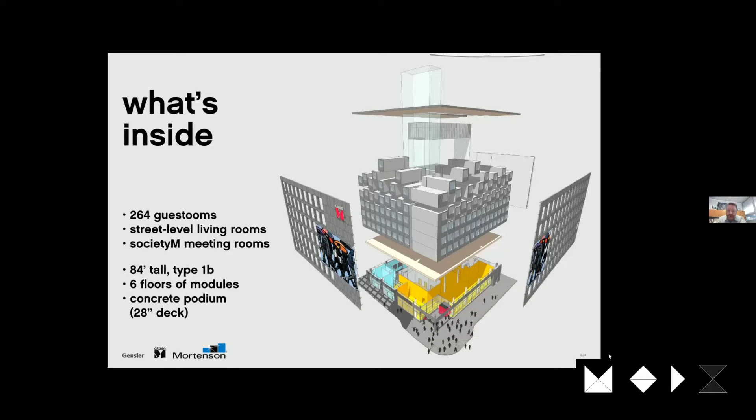So really just trying to get just under high rise, 6 floors of modular units. So kind of a conventional construction on the core walls for shear and seismic, and our transfer deck, which you can see highlighted there, is a 28-inch thick, mildly reinforced concrete deck. So heavy concrete deck, where then we can stack out what turns out to be 222 modular units to make up the 264 guest rooms.

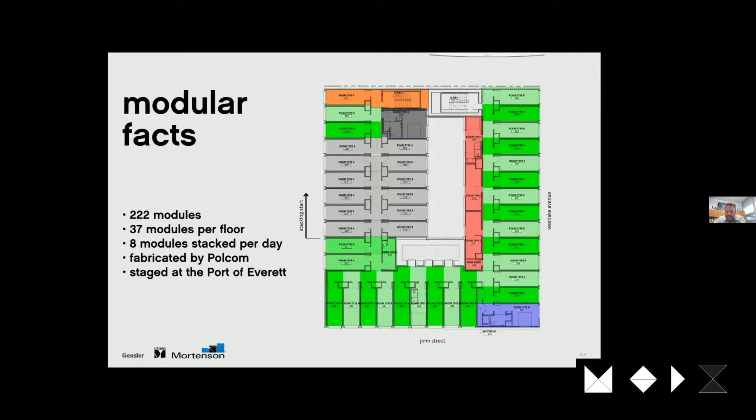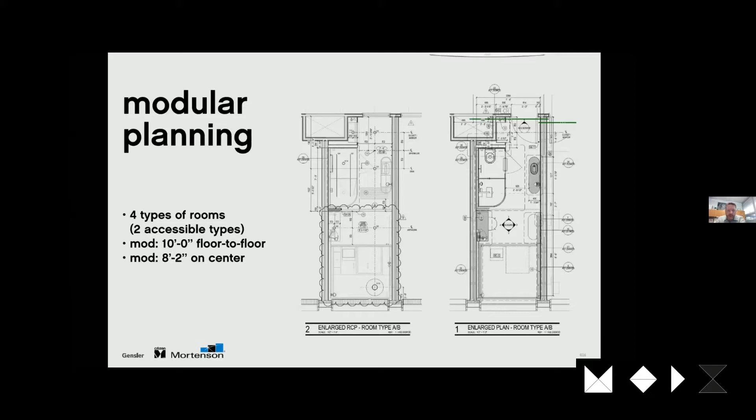So this was our first adventure into full volumetric modular as a company. citizenM had plenty of experience in Europe, and we're in the middle of stacking out a hotel in New York, all being manufactured by Polcom. Polcom is out of Poland. So we quickly joined forces with them, went to their factory, tried to understand their business so we can start to put together all the details and coordination between our local designers and the Polcom manufacturing designers.

So the big thing with modular is really putting together the drawings in a way that we could coordinate with the local AHJs, authorities having jurisdiction, and then also with Washington State L&I. So in Washington, Oregon, and Idaho, modular manufacturing is the jurisdiction of the state, and the state here only allows, or at least at this time could only allow, L&I inspectors to be in the factory. So what we had to do was create 2 sets of plans, one for the city of Seattle, SDCI, and one for Washington L&I, so they could see the difference between factory-built modular and the local built components.

So in this drawing, you can see that things that are in half tone are those things that are going to be field applied and installed, and the things that are in full tone will be modular components coming from the factory.

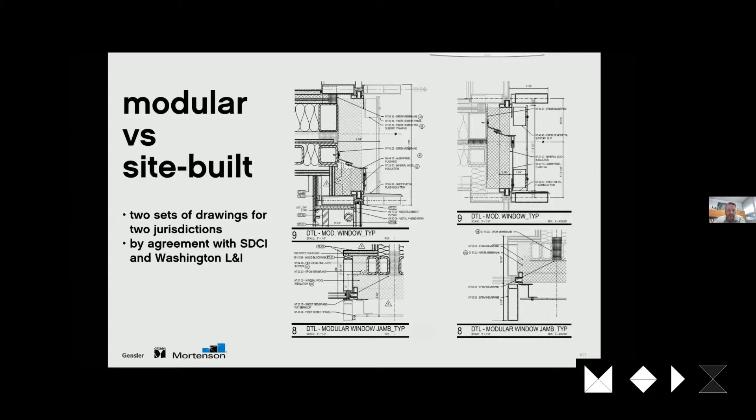The other thing that we had to do that was really unique here that hadn't been done by citizenM or Polcom in the past was build these cages and these units to fit in our seismic conditions here in the Pacific Northwest and on the West Coast. When they built in Europe or on the East Coast, seismic really isn't considered. So they would build the cages very stiff. And the stiff cages were great for transportation and preservation of finishes on the inside. But in Seattle and in these high seismic zones, the cages actually need to be flexible and they need to be able to move in a seismic event. And that caused problems for us with our finishes.

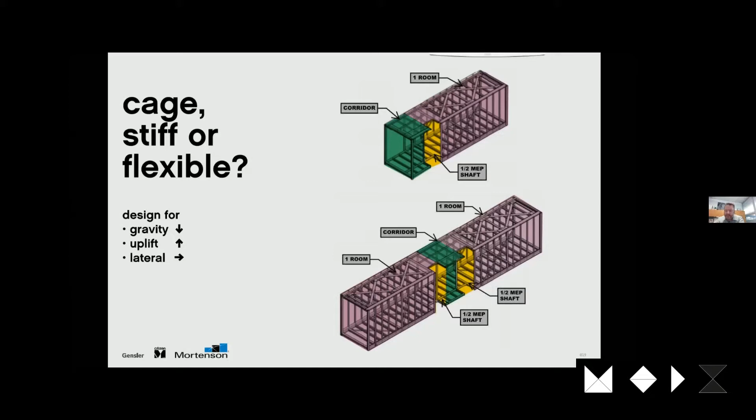We initially put together a cage that met the seismic requirements, finished out one unit and drove it on the roads in Poland, which are definitely a good test, pretty bumpy roads, and came back and saw that we had major cracking issues with drywall and finishes because the cages were too flexible. So we ended up putting temporary shipping braces on all the cages to stiffen them up on transport, but then had to cut those in the field once we stacked them to allow for seismic movement.

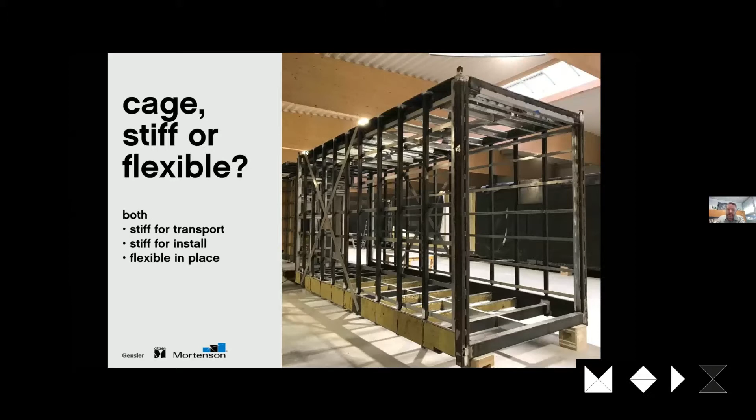So when you look at this picture of the cage, you can see this X brace here. Gauge metal X brace was only there for transportation. And then once it got to the field in Seattle, we had to cut the straps at the top to unlock the cage to allow for more seismic flexibility.

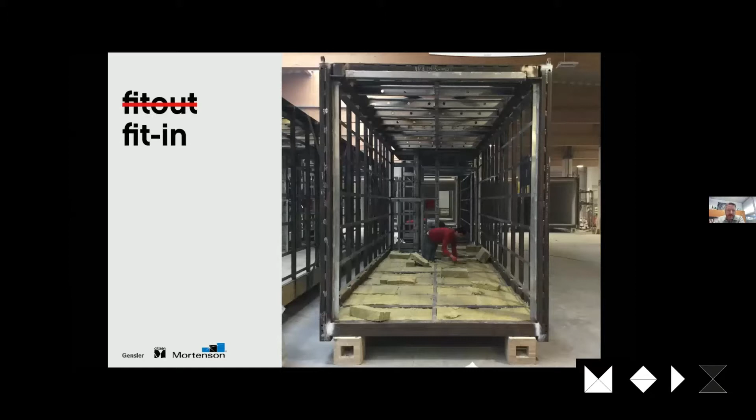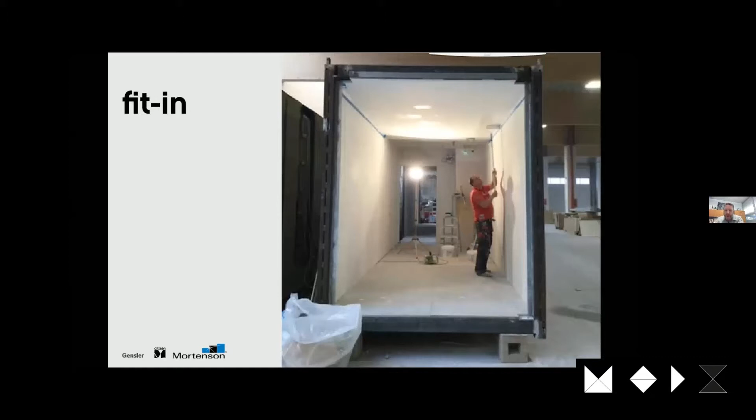I guess one of the other interesting things with modular, if you haven't done full volumetric modular yet, is really how it's constructed from the inside out. As you can see, the insulation, the wiring, all the finishes are built from the inside, and then completed on the outside when the inside's done.

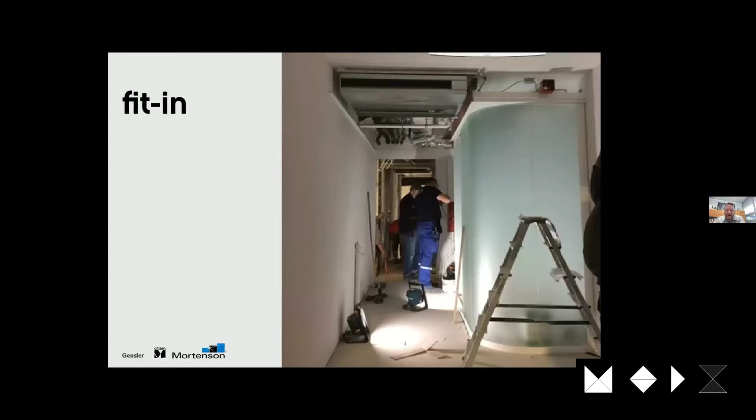So here we're building their hotel rooms complete. All finishes are complete. This is a shot of that modular unit in the factory. Everything's in: the flooring, the glass shower pod enclosure, the HVAC, all the wallpaper, wall sconces, everything's in except for the mattress in the bed and the TV on the wall. So again, speed, quality, when you're in a factory setting and you're repeating things over and over again at one level, factory floor level, versus climbing up and down a building, it's just much more consistent, and it's easier for us to control the quality.

The big thing here, the golden ticket, like I mentioned, is Washington State L&I inspectors were full-time in the factory, witnessing the installation and the plumbing tests and all that, and really QCing the unit as it was being built.

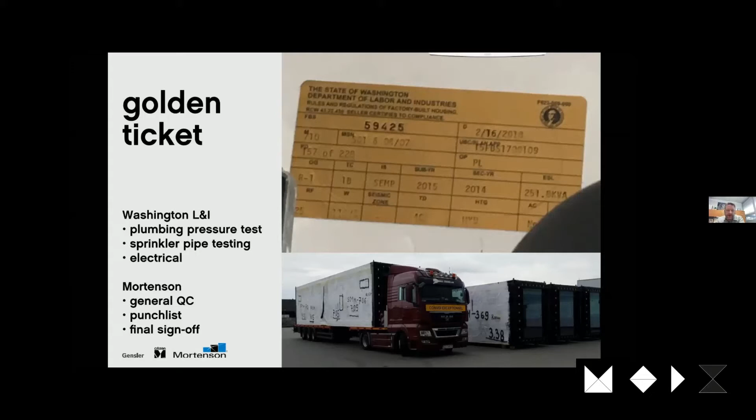And then final compliance with them is this State of Washington sticker that they put on over the door of each unit, so that when we set them in Seattle, the local inspectors knew that L&I had already inspected inside the rooms, so they didn't enter the rooms. The only thing we did in Seattle was pull the fire alarm wiring, so the fire marshal would go in to see the smoke detector, fire strobe, and fire alarm wiring go in. Other than that, it's all inspected and finished by L&I.

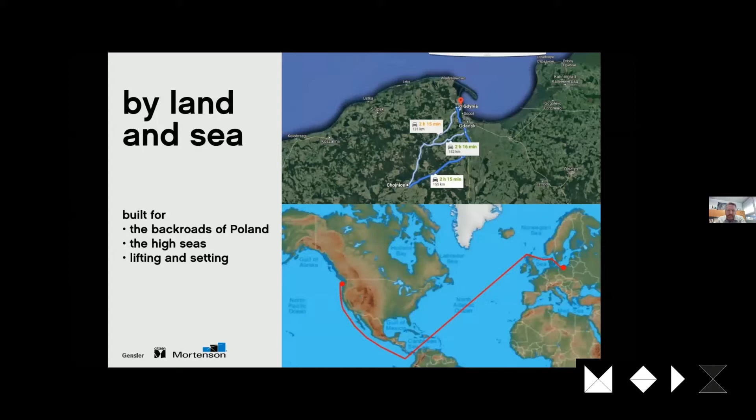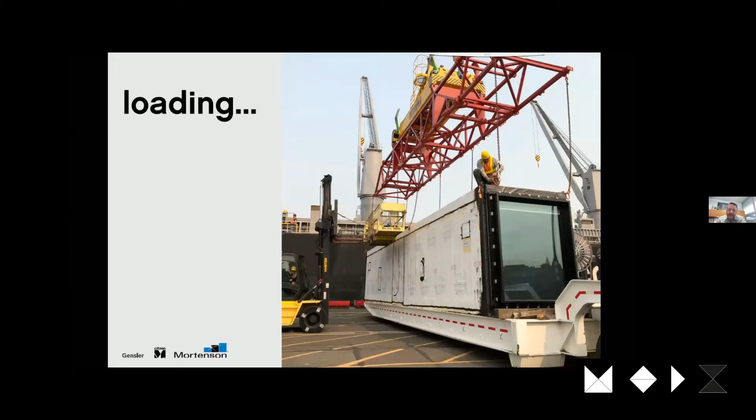So almost all the units for the hotel were shipped at once. Most all of them were shipped and stowed inside the shipping vessel. Several were put on the deck above just because of space inside, but the majority were shipped inside the vessel.

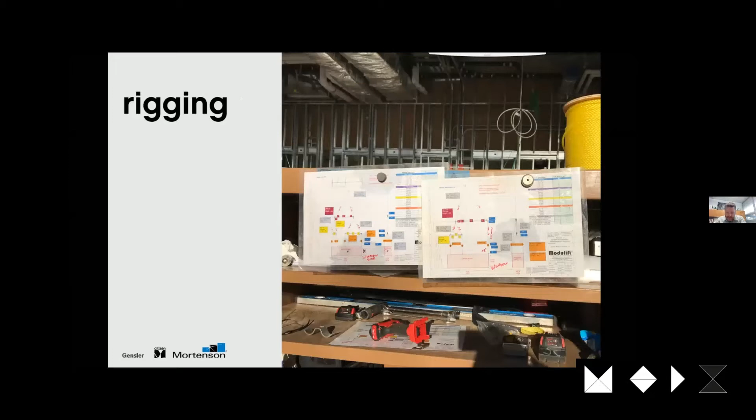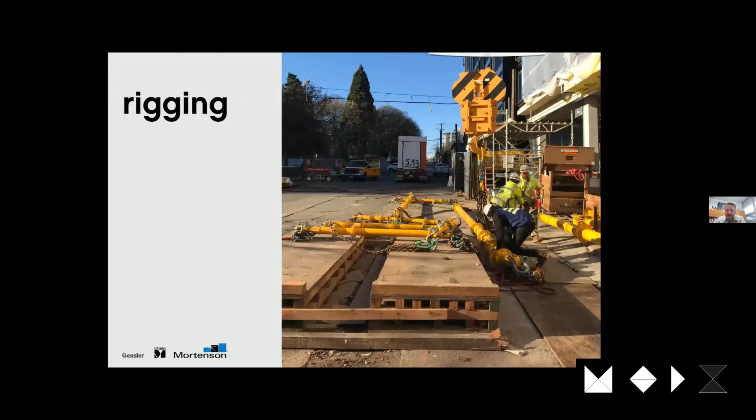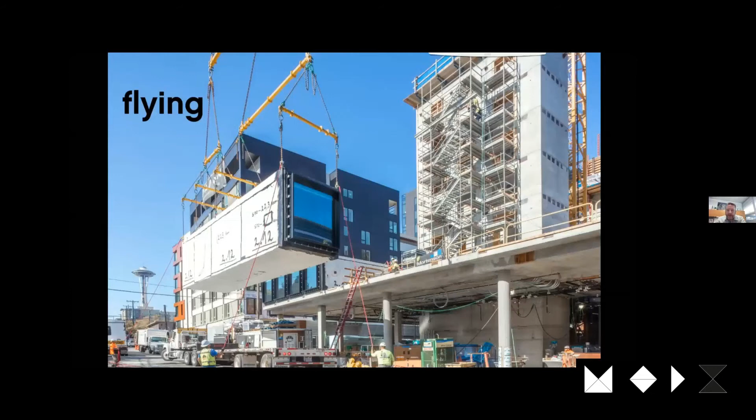So once we got them to the site, really planning the rigging for them is pretty complicated. There were a lot of different configurations, a lot of different harnesses to connect. And this is on the list of lessons learned. This is one where we've tried to make the rigging configurations and the center of gravity on the units more consistent, because these changeouts of rigging can take quite a bit of time between modular unit types. So you can see it's pretty elaborate just to get one hooked up. A lot of work goes into it before flying them on the deck and stacking out the units.

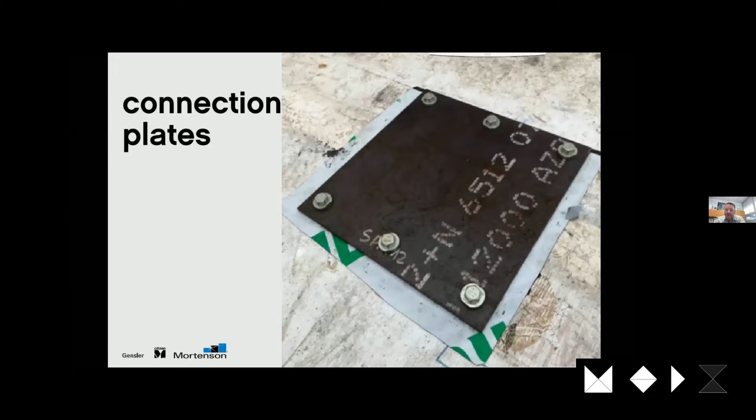We couldn't pre-drill them in the factory because of the high seismic conditions. The bolt holes were not allowed to be slotted, so they had to be really as-built in the field and drilled in the field. So each level, you can imagine 6 levels of all those plates. It's a lot of drilling, a lot of holes in module units, a lot of work.

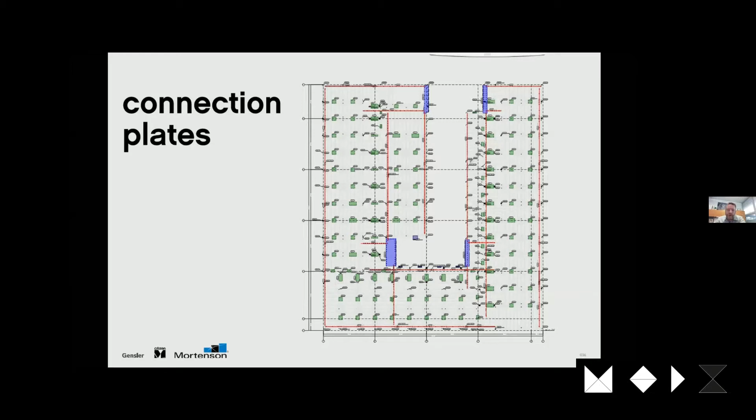So, we talked a little bit about the benefits of the factory. Not only is it quality, but it's precision. The construction tolerances were really tight and things fit up really well in the field. As they built the cages in the factory, they would use a total station to measure the cages and ensure that they were square and all within 1/8 of an inch overall tolerance from end to end, which is really tight for field construction.

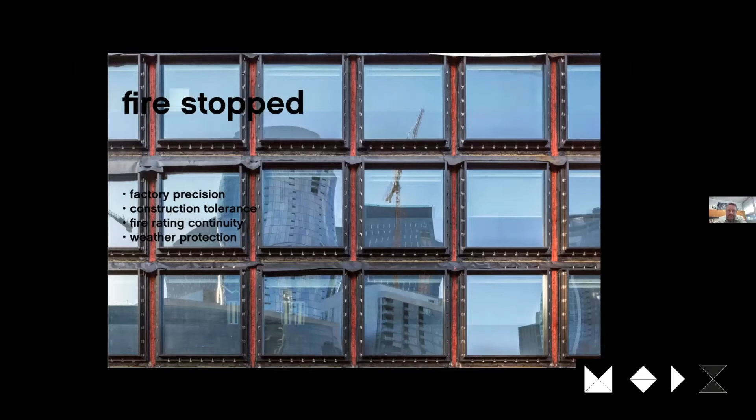So weather protection, fire rating, you can see the joints in between. We had to go through and stuff them with mineral wool first, then spray them with fire caulking. You can see the horizontal stuffed, and then the fire caulking follows, just to make sure there's no gaps in between that can draw smoke or flame.

So there's Seattle's hotel as stacked out. So that's the final stack. And when we got to the roof, we put metal decking down and poured a more conventional concrete roof topping before our insulation and roofing materials went down.

So next we went to Los Angeles. So the Los Angeles project for citizenM is in the heart of downtown LA. Pretty constrained site. Again, though, really conducive to modular, right? So modular, what we love about full volumetric is it's less disruption to the neighborhood. If you have tight sites that you don't have laydown areas for materials, you're stacking out, in this case, it was 9 floors of modular.

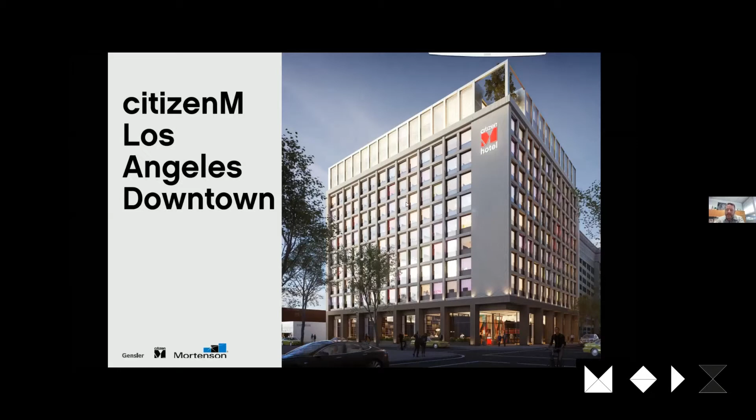There's modular units up here. So 9 floors of modular units that are stacked out by just delivering trucks, right? So really a lot less disruption to the neighborhood, a lot less need for laydown space, and much faster approach. And in this case, this site was very conducive to modular, as it was pretty much a square site. So 11 stories, 315 keys, 9 levels of modular units.

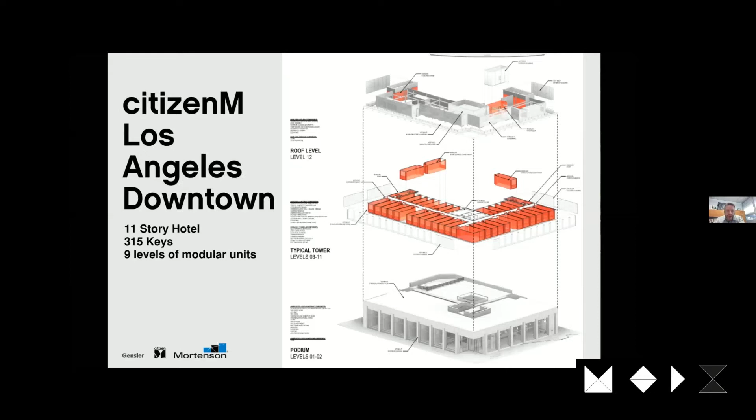And you can see in this exploded view, we've also incorporated some of our MEP rooms up at the roof. We wanted to see what else we could push to have delivered modularly versus field built. So I think that was a good choice here to kind of add to what we were traditionally doing or learning to do.

In this case, though, we did switch manufacturers, and for some of the reasons we talked about before, the lessons learned, the modular units coming from Polcom were wrapped in DensGlass and then some temporary waterproofing elements. And in this case, we went to China and explored multiple manufacturers with citizenM, probably 8 months in advance of starting the LA project, and really found that CIMC, who is one of the world's largest container manufacturers, also has extensive experience in modular manufacturing and production. As a matter of fact, they have 3 million square feet of factory floor dedicated solely to modular production. So it's in Jiangmen, China.

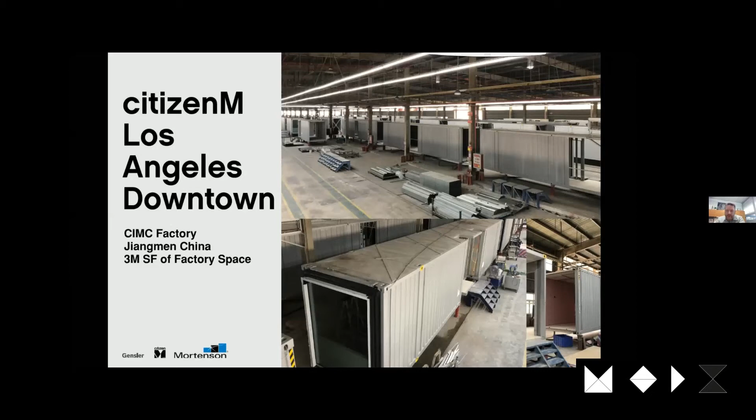So these pictures you can see are actually our LA modular units in production in one of their 1 million square foot factory floors. So again, similar to what we did with Polcom, we want to get everything inside the box, and these boxes are proven container technology units that not only are weather tight and stand the test of traveling across the ocean on top of big container ships, but they also come with that component of connecting and detaching for transportation and in the field connection.

So the same container technology castings used to connect to the ship and to connect to the trucks when delivered are the ones that are used to connect the building in the field. So no drilling of holes. And in this picture you can see at the end here, the window was protected, so there's some steel X-brace on the outside of the container that's covered in plastic just to protect the glass. That's the only reason we have that wrap there.

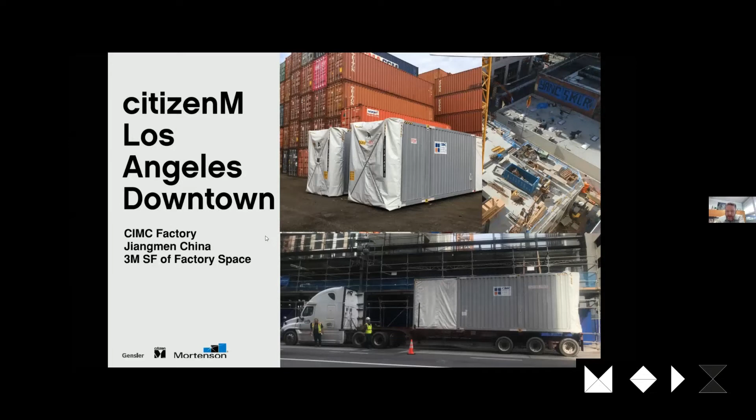Again, inside the box, these are the units. They're fully built out, everything included, all the finishes. So in the factory, in this case, the state of California regulates a little differently. They allow for third-party review. So they had a third-party inspection agency in the factory at all times.

Just like we did with Polcom, we had Mortenson factory representatives there. So we had folks there that are controlling punch list and making sure that we're doing first-time quality in these units. So when they deliver, we're not fixing anything. They're 100% punched out. Every little detail is completed and signed off before they leave the factory.

So once they arrive on site, we can stack them out just like we did in Seattle. Some similarities: you can see the conventional concrete core in the middle. We have our concrete transfer deck that they all sit on, but in this case, we added the element of steel shear wall braces versus concrete. And what the steel allowed us to do was thin up the space needed for the shear and gave us more room to add modules and add guest rooms. So we maximized the layout by going with this hybrid of concrete and steel to achieve the seismic shear.

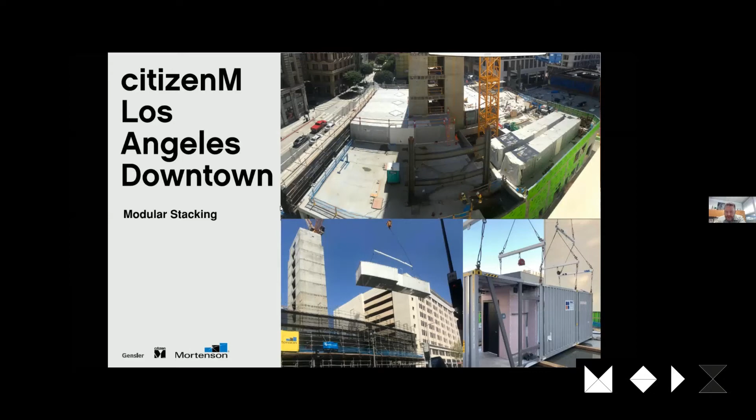So the next slide here I wanted to show you is that connection. So in the top is our transfer deck clean, our core done, stripped, ready to go. And then over to the right here, and maybe I can move this out of the way, you can see the corner castings are the connectors for each unit. So this is the transfer deck. As the units set, they lock into that casting, and then there's a bolt that gets threaded in and bolts and assembles them together.

So really, the big lessons learned are speed of erection, not drilling holes in the field, maintaining that water tightness throughout so that we don't have water damage that we're going back to repair. And that's really what we've been able to achieve in LA. So quickly, I want to show you real time what LA looks like. We're still in the middle of stacking. So I wanted to show you a little video of where we're at.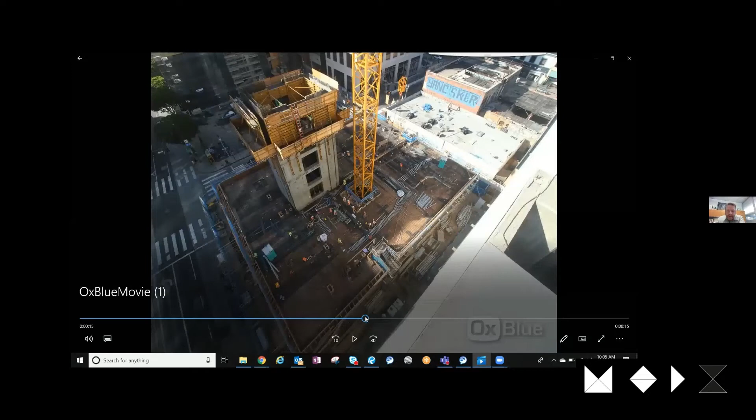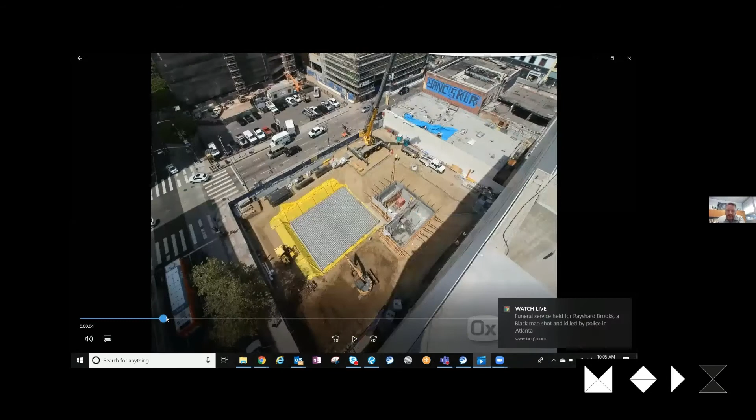So again, just stripping down to the basic site itself, mat foundation for our core, no basement for citizenM, no parking for citizenM. Most people travel via rideshare or Uber or something to the hotel. So no parking required.

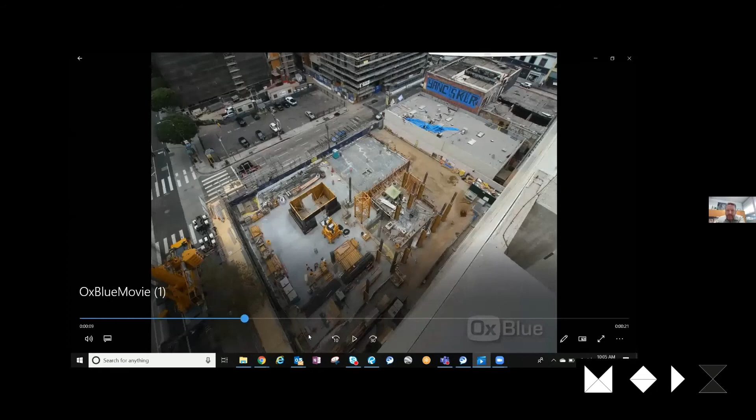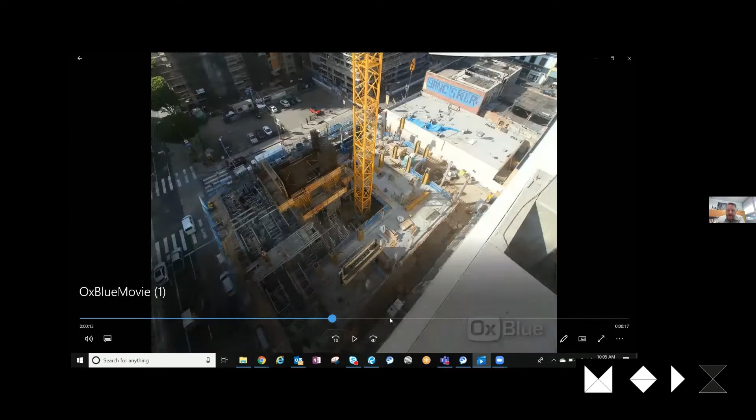So traditional mat foundation and concrete core coming up. First level is living room, citizenM. We have a mezzanine level here you can see for mostly back of house, mechanical. And then we get up to our transfer deck, which is again a mildly reinforced 28-inch thick concrete deck that's going to support the weight of the module units.

And then once that's done, you could see that we started to bring up our brace bays here, our shear walls. The steel shear walls are in the north corner and the southeast corner. And now we're ready to start setting our units. So you can see as they start to come in, they're stacking really tight. Again, the tolerances have been excellent.

Our corner castings are in the deck there. You can see them. They're all set to receive them. They've been shot in and leveled out so that we know that we're stacking at the right elevation to start so we don't have issues as we go up. And really the goal here was for the team to stack a floor a week.

But we knew that we would start out slow and catch up and exceed that floor a week eventually, but on average, we wanted to make sure overall we were at a floor a week, and we're just under that. We're very close to a floor a week of units.

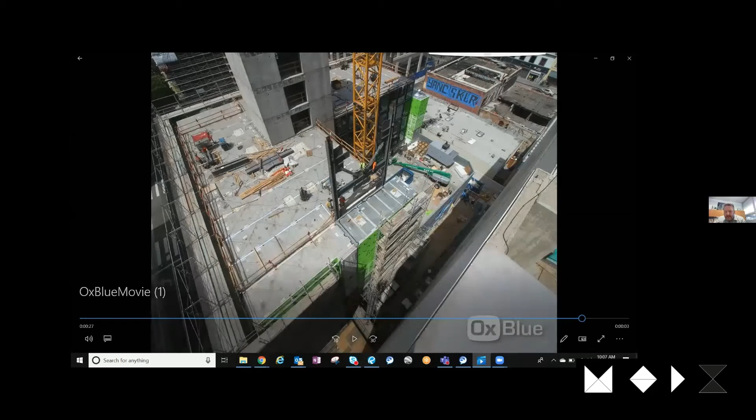And in this case, you can see too, we have stair modules, which are these green ones at the ends, and then the guest room modules, very similar to what we saw in Seattle. As far as the layout, again, that's the nice thing about citizenM is they have one room type besides ADA, which is a requirement, right? Otherwise, it's just one room type repeated over and over again.

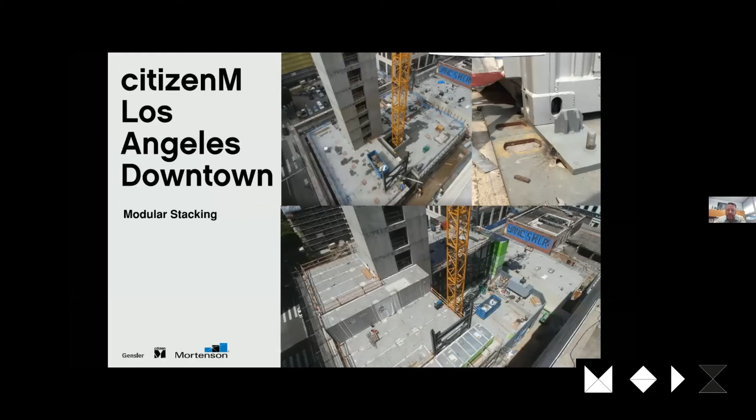So really the goal was a rollout, and you can see citizenM is pretty aggressive in their rollout. When we started working with them, they had just moved into North America. So they only have hotels open in New York and Boston, and now one in Seattle. But you can see their plans are pretty aggressive and significant. And so I think we're getting closer to being in rollout mode with them, where we're repeating things over and over again, so that we can get faster and better.

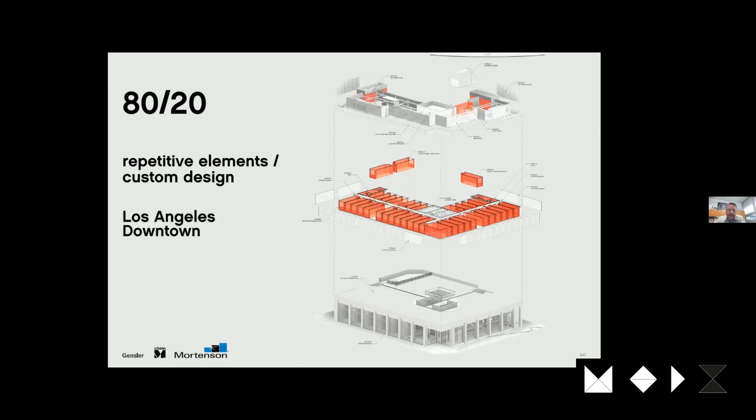To reduce the time of construction and design for them is a big deal. Really taking the 80% of the building, which is the module components, and standardizing them so that you're only recreating the other 20% in the custom lobbies or some of the mechanical spaces. That is the goal of the team, really to fit Lego parts together, and not follow the traditional approach where every individual project is a new project.

It's how can we repeat things over and over again and truly roll them out, and look at really how our teams function too. I think in the traditional approach, there's scope issues. There's this very linear process, and there's limited trust between the architect, the owner, and the contractor.

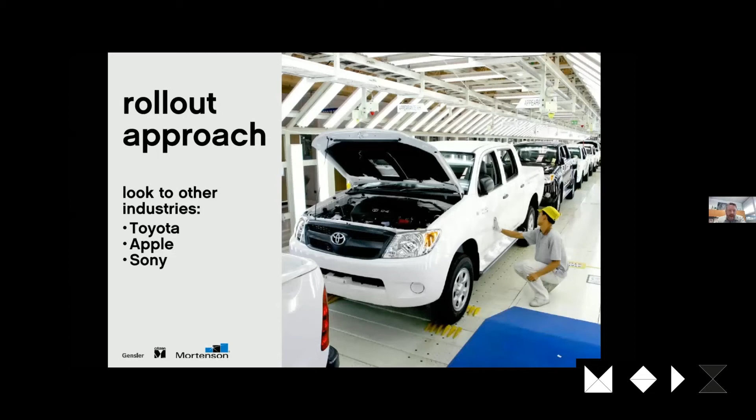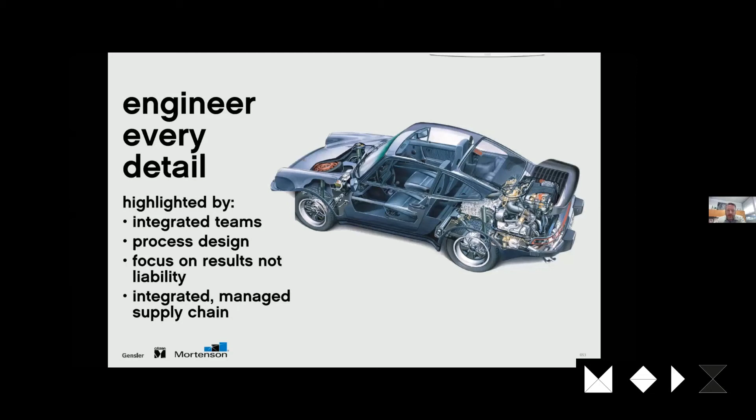And so what we really wanted to do, and what citizenM wants to do, is take a look at the Toyotas, the Apples, the Sonys of the world, and create this integrated team where we're really focused on process and rollout, and how we can manage the supply chain and get better together. And a big part of that is the design focus, and this whole speed to revenue for citizenM is where they see the value besides the quality.

They're in the middle of CA and fabrication of all the hotel units at the same time we're finalizing design and permitting for some of the public spaces. So really that team that traditionally would design, get permits, and then go into CA, construction management, now has to fulfill both roles at the same time. So they have to have the right team.

So again, the big factor is the increased speed to market. So for citizenM being an owner-operator of their hotels and their brand, speed to market is everything for them. So the faster we can deliver a project modularly, the faster they start gaining revenue. And then also reduce cost and risk. Building modular really helps with the shortage of skilled labor that we're all seeing around the country, especially in Seattle.

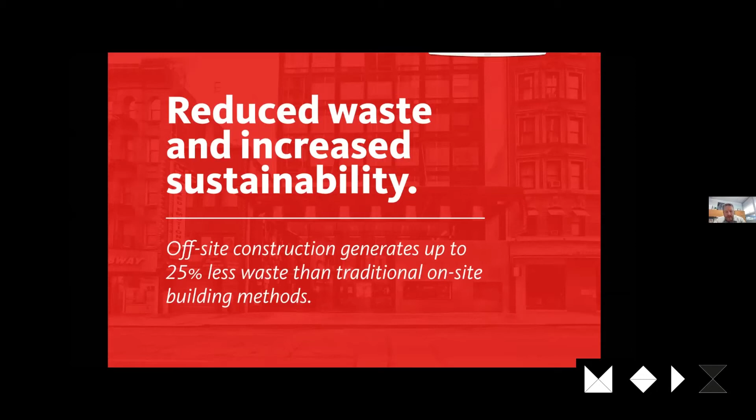Now, I will say the one environmentally not so friendly thing is probably transporting them around the world. We've really been looking to promote more of this in the US, where we can manufacture here, travel by rail car to the cities, and reduce that environmental footprint on shipping and transportation. So really, that's what I got. It's kind of a high-level, quick overview of our journey with citizenM.

I would say it takes an owner like them who are very forward-thinking, understand the power of teams and people with a common passion for trying something different, not being afraid to do something different, and pushing the boundaries of what's possible when it comes to our old traditional methods of construction. It's very refreshing, and it's great. You have to have a partner like citizenM or Gensler that are all in. If people aren't all in on it, it's really hard to get there.

So with that, any questions? Yeah. Thanks, Phil.

Thanks for the deep dive, really a lot of content and a lot of candidness, which we try to encourage in our own research too. For us to move forward, we need to identify our obstacles as well as our successes. On the one hand, you guys have put together a really unique team and relationships between yourself, owner operator, and also with Gensler. And so you're generating some real knowledge.

But stepping back a little bit, we've also in our research noticed some persistent obstacles to the growth of market penetration, particularly in the US. One that you just brought up is the capacity and capability of US manufacturers. So maybe speak a little bit to that. Poland and China delivered a product for you, with some obstacles, in a way that a U.S. manufacturer wasn't able to. What do you see as keeping it back, particularly in steel mid to high rise?